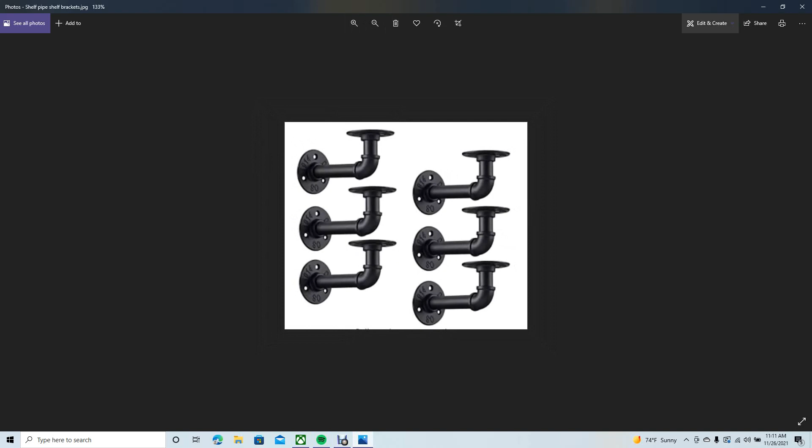It's easy to do. We're going to follow a guide, and I want to show you how to do that. So first thing we want to do is launch DesignSpark Mechanical. Once it's open, we want to create a new design.

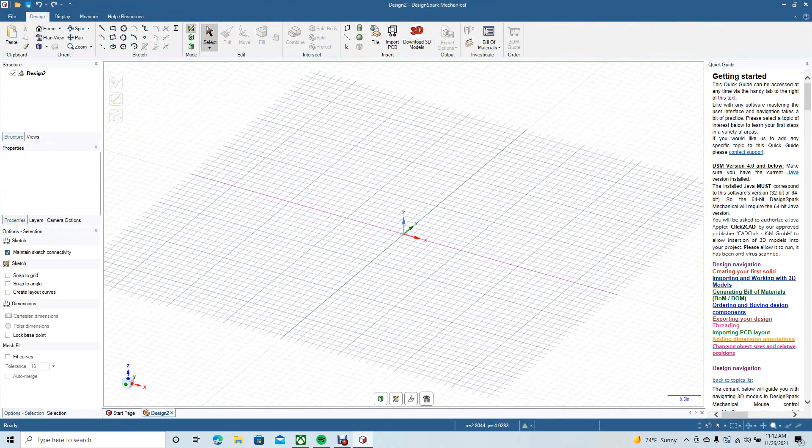We want to change the view to plan. This doesn't have to be any particular size. Obviously we want it to be like the drawing, so we're going to create a long pipe shape and then a shorter one.

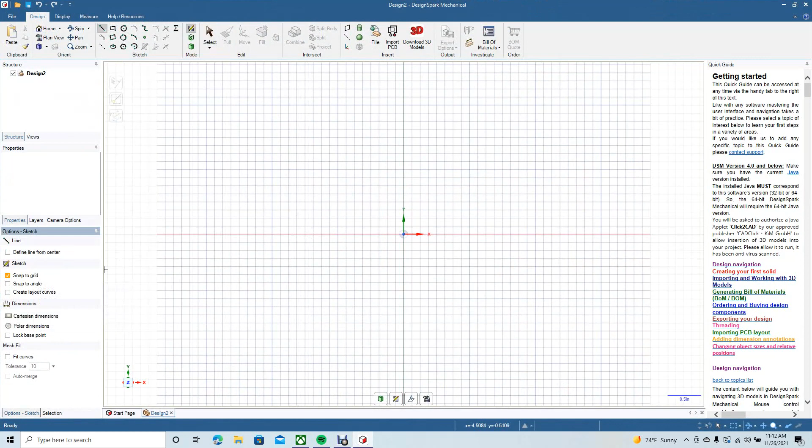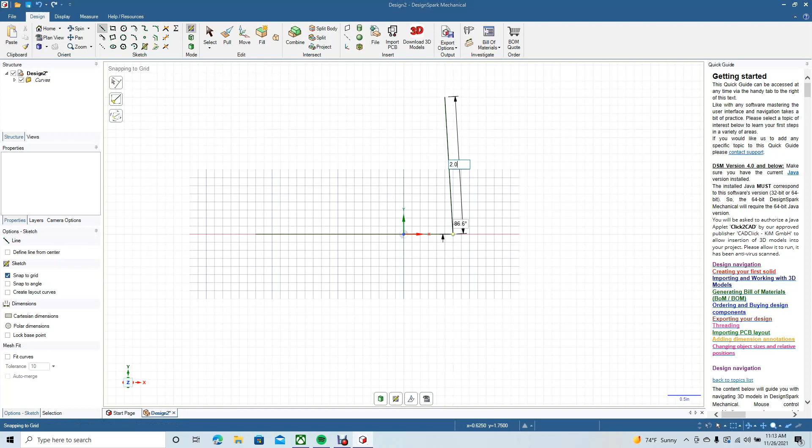We'll go back to DesignSpark and use the line tool. I'm going to turn on Snap to Grid. Let's go 3-inch, so we'll do a 3-inch long pipe. And then we'll do maybe 2. Undo. Let's make that 2.0.

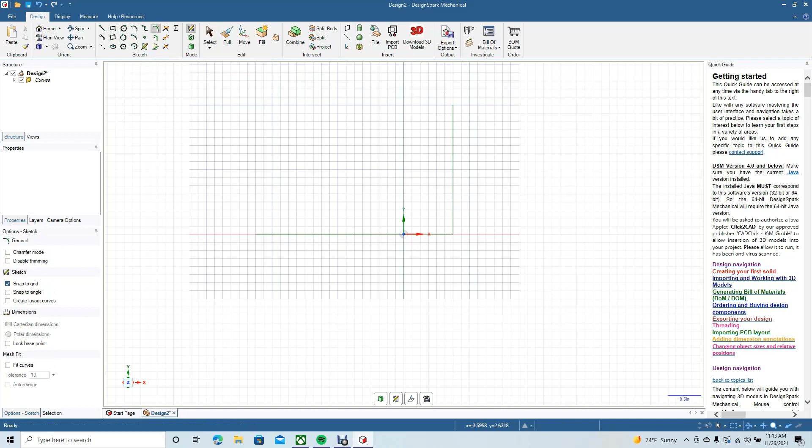I'll click select. I'm going to put a radius between this and this, so we'll go ahead and get our create rounded corners tool. Probably do 0.875.

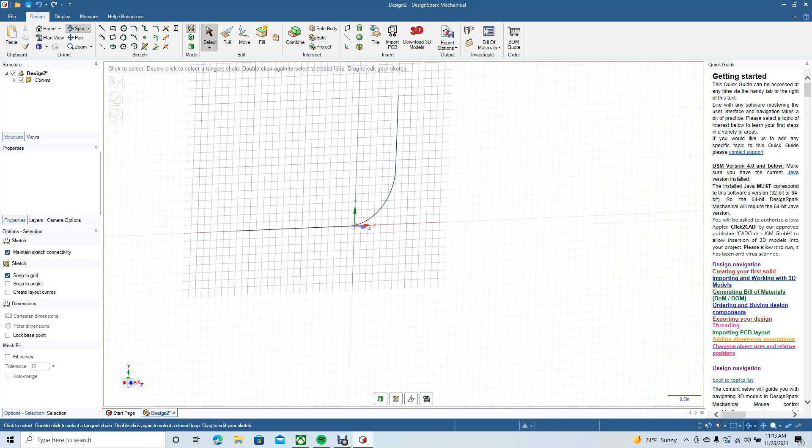Now we want to spin the part. We'll go to mode, go to the 3D mode, and select just the end. Go ahead and spin that a little bit more.

Now we're going to put our pipe on there. We'll click right where that point was that we selected, and drag out. I'm going to do a pipe at 0.75.

Now go ahead and hit select. Now we're going to go to the pull tool. We're going to select that circle we just created. We'll use this tool right here, called sweep, and sweep along a path. Hold down the control key and select all of these points. When you're done selecting all the points, go ahead and do a full pull. It's going to sweep it along there.

Alright, so we'll go ahead and spin it. It's a nice little wall bracket. Might have been a little too thick, so we're going to undo. Instead of 0.75, we're going to do 0.5.

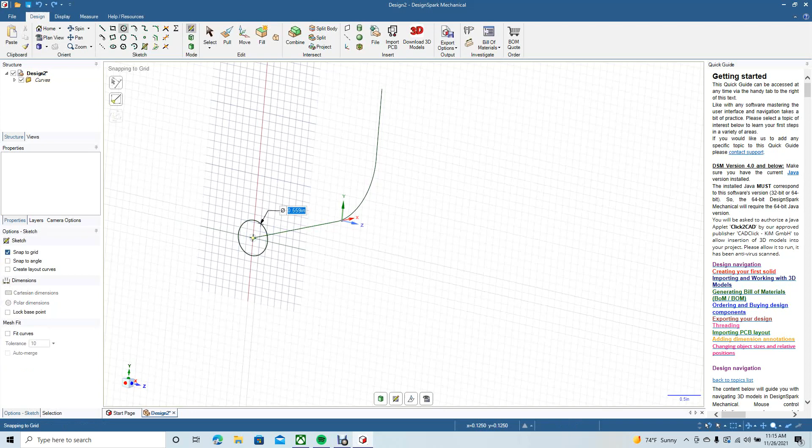So we'll click there, let's go 0.5. Click off select, go to pull, select the circle, go to sweep, hold down the control key to get all these points, then hit the full pull. Okay, I like that a little bit better. So we're going to spin that.

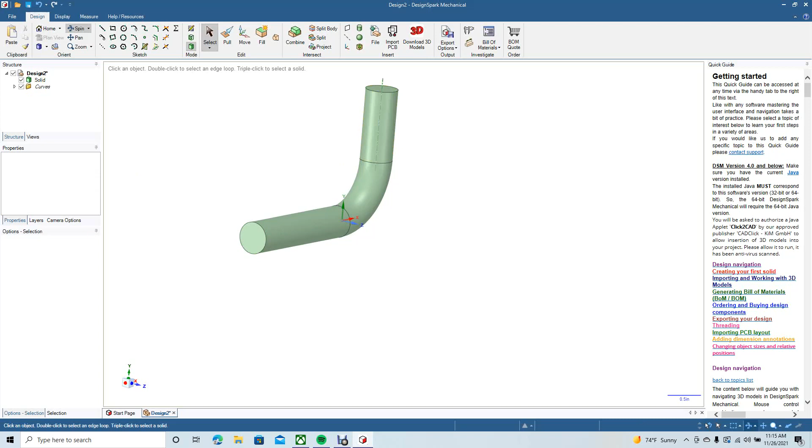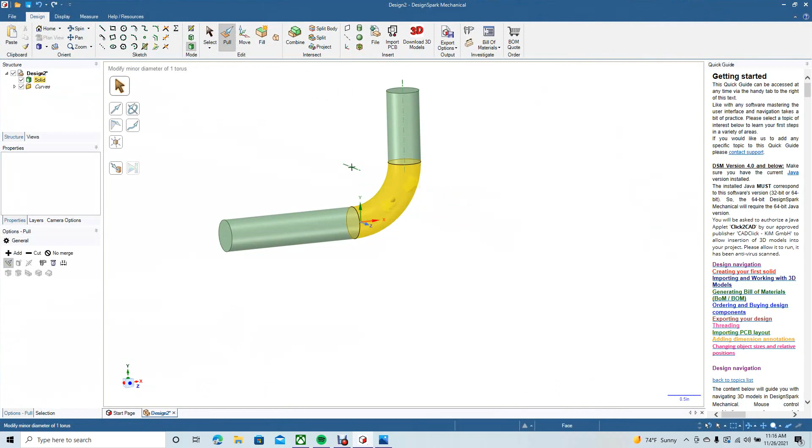Okay, so we want to go back to DesignSpark, and click on this pipe right here. We're going to pull it out a little bit bigger, so it's like the one in the picture. Alright, that's not too bad. Back to there. Okay, yeah, that's fine. Go back to DesignSpark.

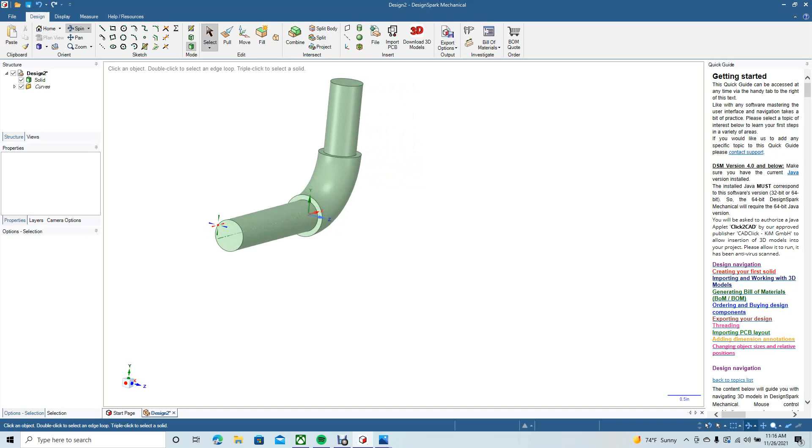We want to go ahead and hit spin. We want to spin this around. We want to select the bottom part.

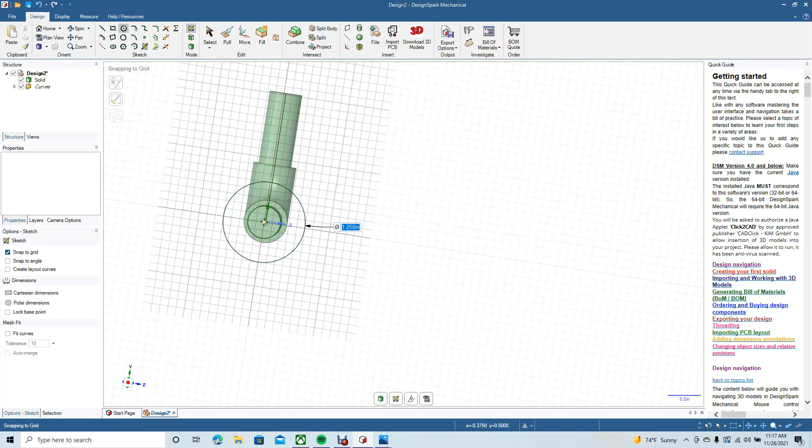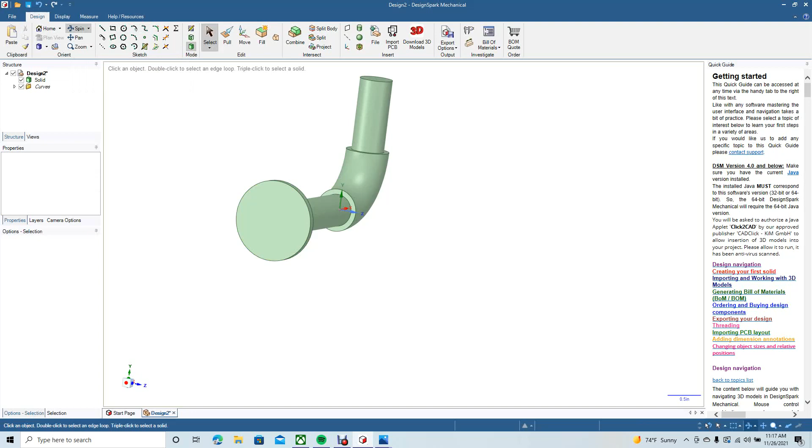Okay, now we're going to create another circle. I guess we could make that 1.25. Go ahead and click there, go ahead and spin, go to pull. Select both those, let's pull this out 0.10. Okay, that's good. Go ahead and spin. Not too bad. We'll go ahead and create one over here.

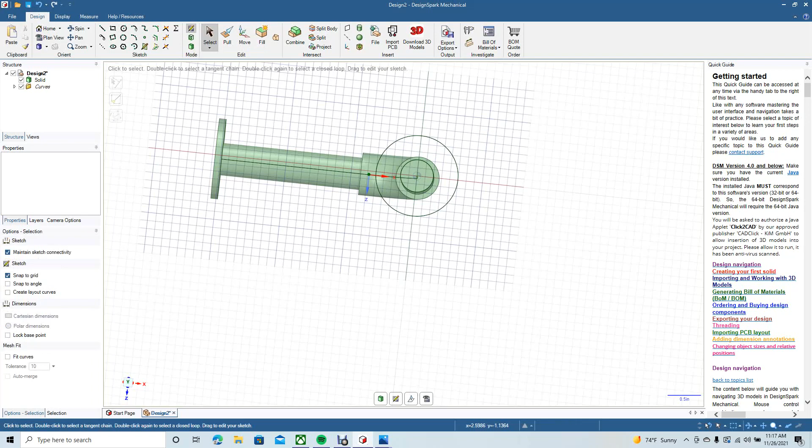Let's click this, go ahead and put the circle there. Create 1.10. Oh, wait a minute, I think that was 1.5. Hold on. Go there. 1.25 is what it was. Okay. Go ahead and spin that. Go to the pull tool. Select both of these. Pull out to 0.10.

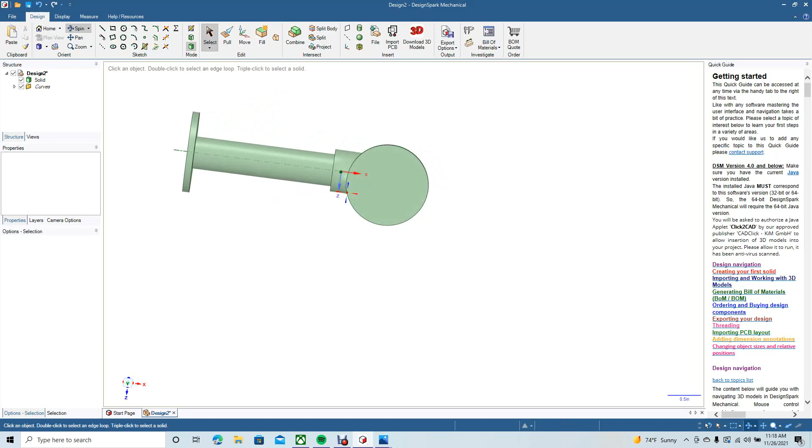Okay, now we're going to put the holes in there. Go ahead and click on that. We're going to put a circle. Because we can go there. Undo. Go ahead and get the circle. Let's take off the snap.

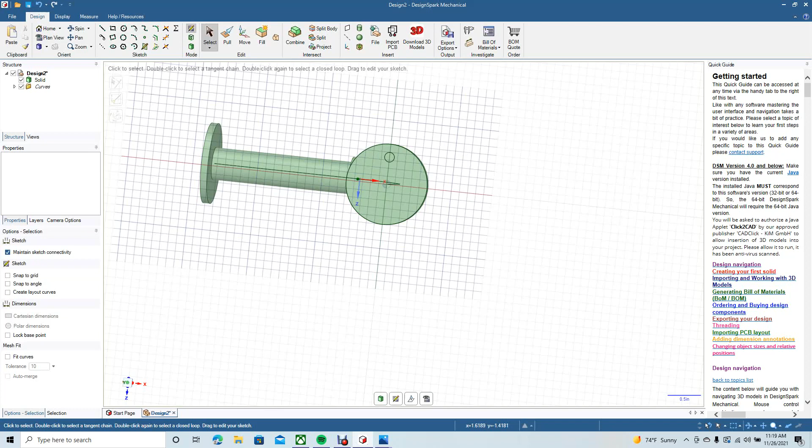Let's make the hole 0.17, 0.15. Alright, let's click off of it, click on the circle, go ahead and move, drag this down to the, go back to the 3D part, click on that, move that down to the center, come over here to create pattern.

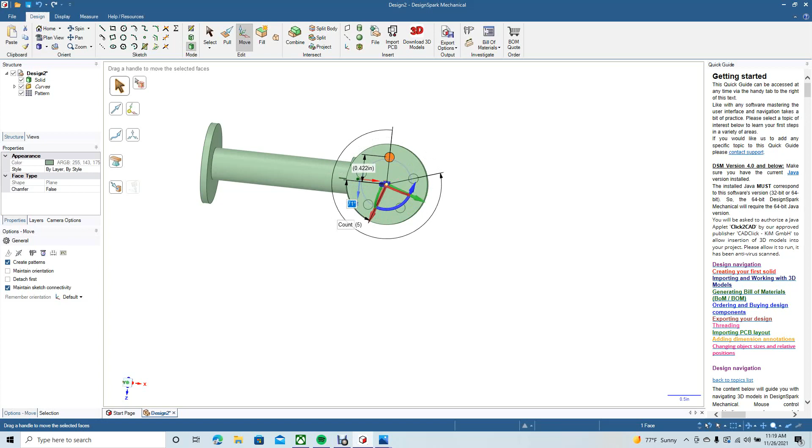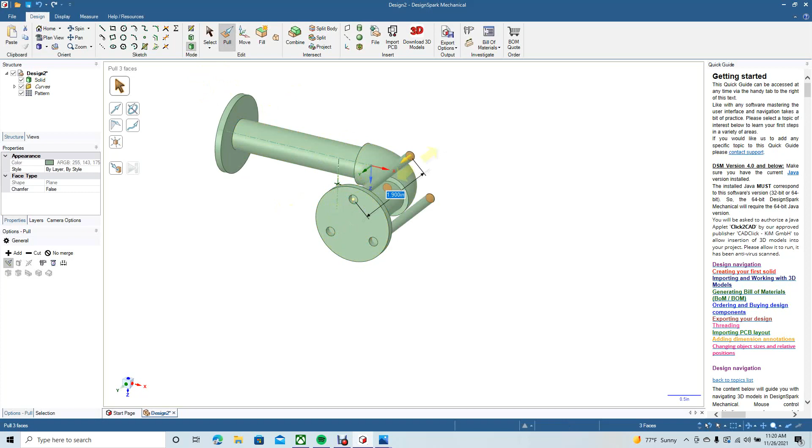Alright, we don't want 6, we just want 3, so go ahead and do there. Go ahead and spin that. Let's go ahead and select the holes. Pull through. Oops, undo, go to minus for the cut. There we go.

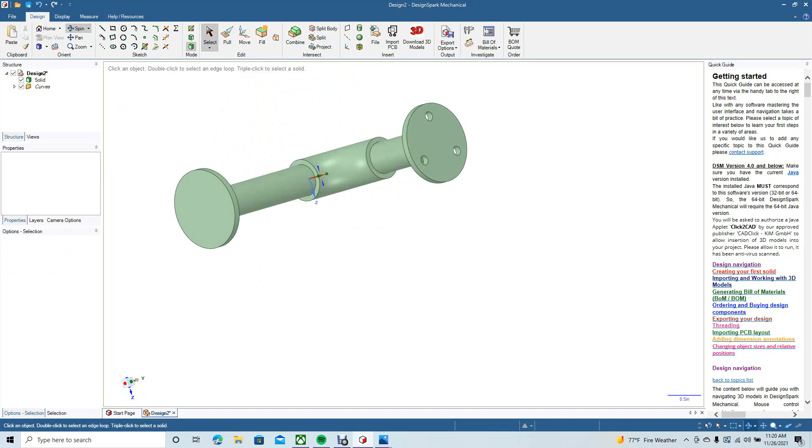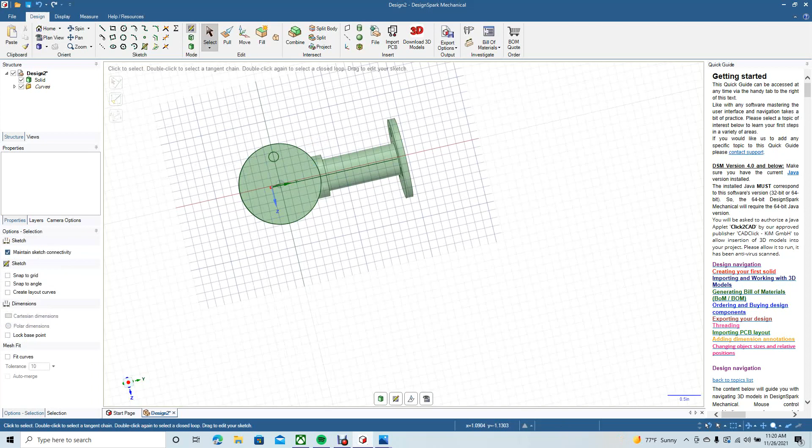Go to 3D tool, click on that, go to move, drag this down to the center, go ahead and revolve that around. Oh, actually undo, create pattern first, go ahead and drag that around, type in 3.

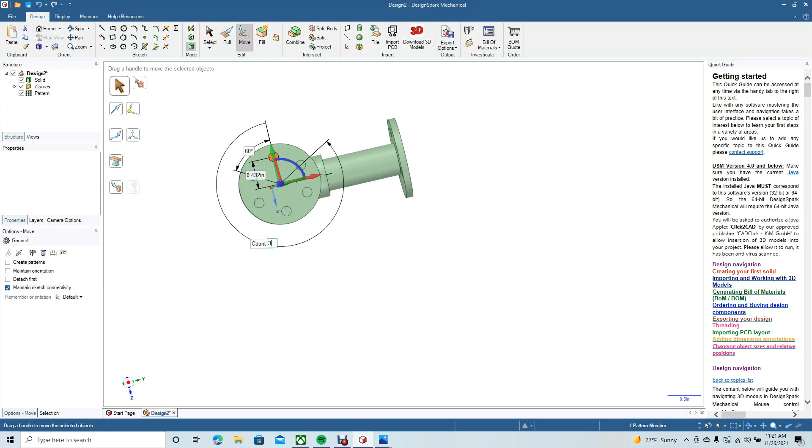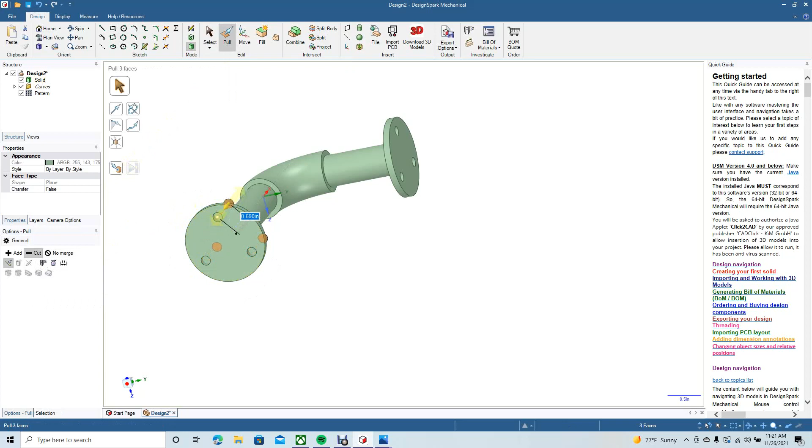Alright, go ahead and spin this. Go ahead and select these. Go ahead and pull. Go ahead and cut. Pull to the outside. Alright, go ahead and get our spin tool. That doesn't look too bad.

I'm going to blow the pipe up a little bit though, so go pull. Undo. Let me pan this over so I can see what I'm blowing it up to. Okay, so go 0.145. That's a little bit too big. 0.135. Nope. 0.14. Okay, we're going to leave them. Go ahead and spin this around.

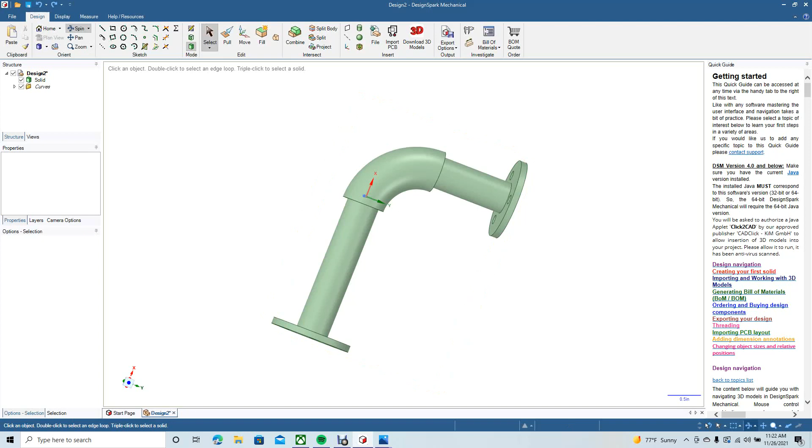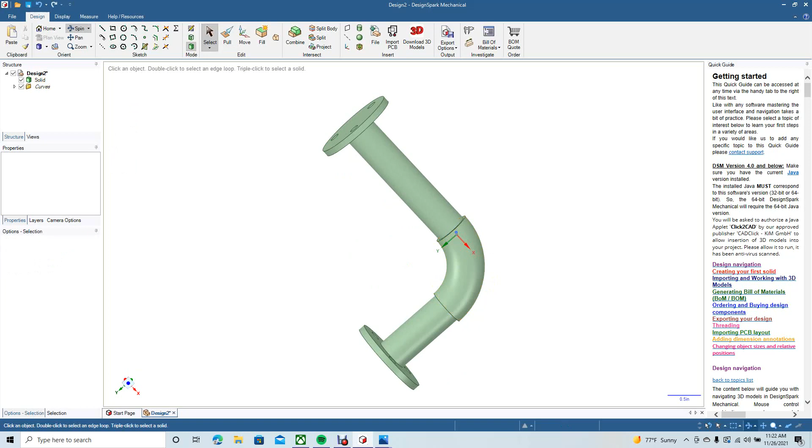Basically, there's your, we can make this middle one a little smaller. This is kind of a little too big, so we'll click on that. We just want it to be a little bit smaller. Alright, not too bad. So we're going to do a couple more things.

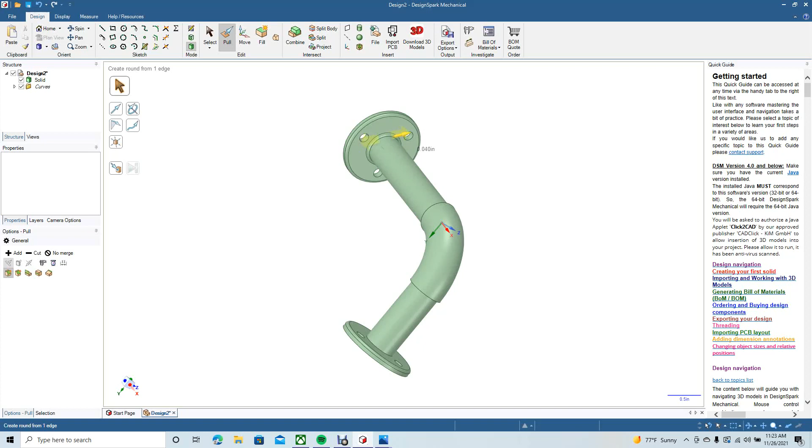We're going to put a fillet in here. Go ahead and click and drag, 0.4, put one in here. Click and drag, 0.4. We'll put a fillet there. Click and drag, 0.4. Put one more right there. Click and drag, 0.4. Go ahead and go to the top.

There you go, there's your bracket. Only last thing we could probably do is put a fillet in here. So go ahead and add a small fillet to there, 0.2. And we'll add a small fillet to there, 0.2.